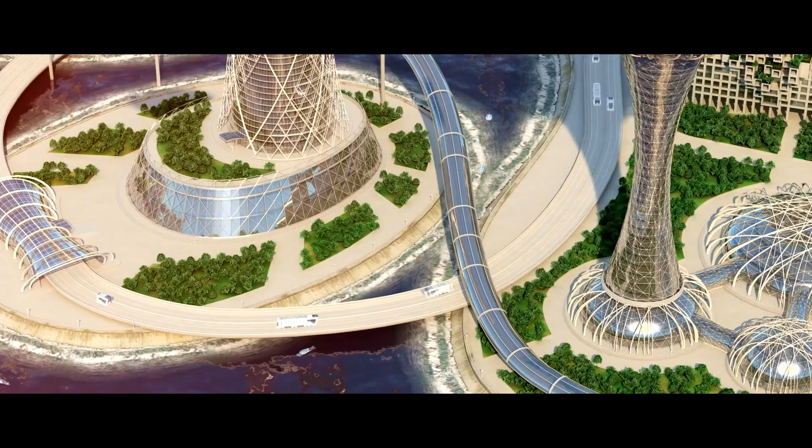To do big things, to do good things, to have a vision—this always drives me in my life. With the LEA technology, we now can contribute to a sustainable global ecosystem as well as to an enhanced telecommunication via space.

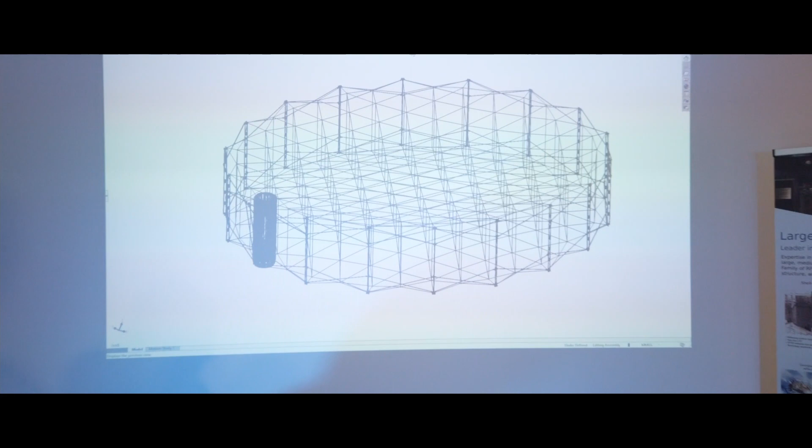Big things can only be achieved when you can count on a team which follows you, which believes in the goals, not only at your own company, but also at the partners, at the subcontractors, all the way long, and even during the Corona restrictions.

LEA is another proof that the ESA programs and the programs of the European Commission can create so much fantastic synergies. The trust of both institutions in us, the LEA team, boosts us now into the world league.

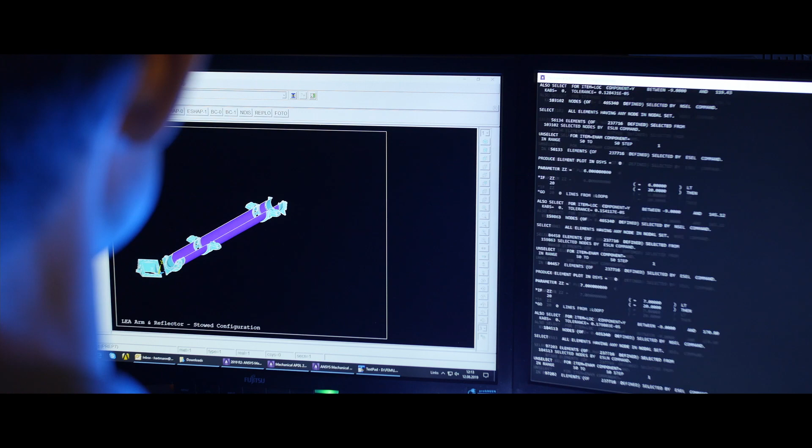The LEA X5 development marks a significant milestone in the development of a European-sourced large deployable reflector subsystem. Such a subsystem is composed not only of the arm and the reflector, but also of a number of other elements.

Being it the hold-down and release mechanisms, being it the electronics with the harness to control the system during the deployment, or the thermal insulation to protect the hardware from the harsh environment in space, just to mention a few of them.

But all of these elements are brought together by HPS to form a qualified large deployable reflector subsystem, LEA.

I'm involved in the technology development of large deployable structures since the beginning of my professional life. In 2010 I started as a research assistant at the Technical University of Munich, and in 2016 I joined HPS, becoming the lead engineer for large deployable structures, including LEA X5.

I'm really proud to be part of the team, having achieved a major milestone with qualifying the LEA X5 subsystem.

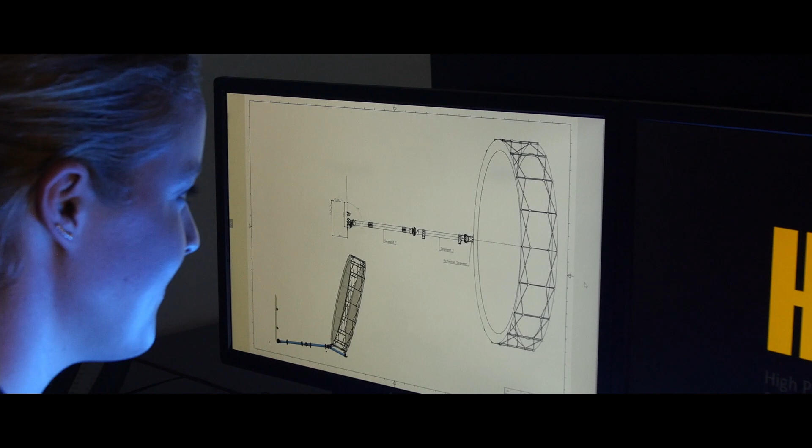Building on the LEA X5 success, I am already working as the project manager for the large deployable reflector subsystem on the follow-on project CIMR. We have a very challenging schedule, with the next milestone being a successful preliminary design review already next summer.

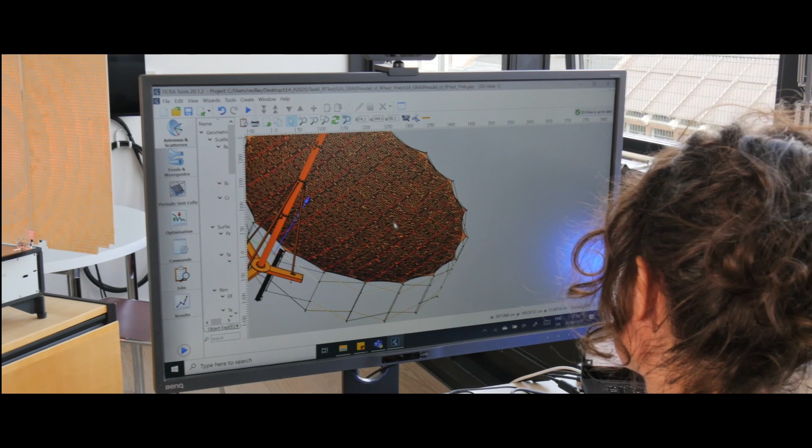TICRA has 50 years of experience in modeling reflector antennas, and our software GRASP is used by all players in the world doing large deployable reflectors. So for us it was a must, but also a great honor to be part of the LEA project and give our expertise to such an important development.

So it was our responsibility in the end to tell if the LEA antenna performed as expected. So it was a huge responsibility.

I have passion for space and I'm a European citizen. So for me, working with an antenna that could be launched in space has been a dream.

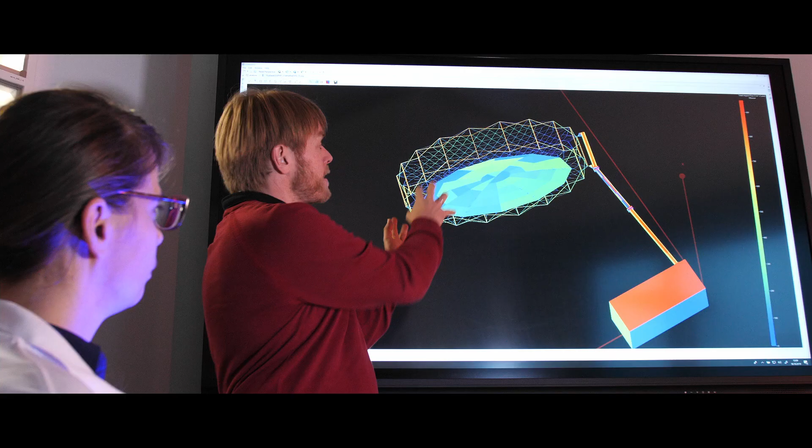After more than 20 years of extremely reliable software developments for space debris simulations and onboard software developments, etamax now proudly contributes to the safety and reliability of LEA in space.

RUAG is a reliable and dependable supplier of deployment systems, and we as a company stand for 100% mission success.

With the LEA project, the technical and programmatic foundations were laid. Examples are the way of working, the development of the deployment subsystems, or materials and processes. So now we have all the solutions and concepts ready to turn this heritage into flight hardware very quickly and efficiently.

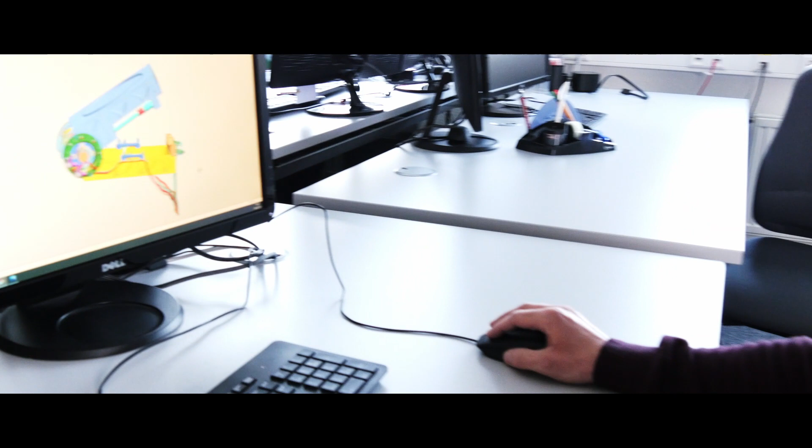LEA started with an idea, and right now we're developing the real flight hardware, and it's quite exciting for me to be part of this complete development cycle and to be part of this straightforward team.

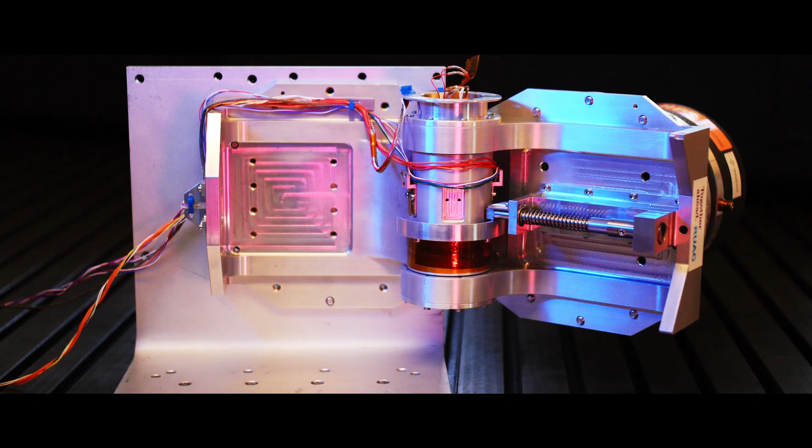On the other hand, we're part of the Sentinel program. At the end of the day, our hinge has to deploy a 60 kilogram mass at the end of an 8-meter arm. So we are building a system which helps us better understand what's going on Earth, so to understand climate change.

This project opens up completely new business opportunities, not only for the European space industry, but also for our company, von Hörner und Sulger. It's a huge step for Europe's technological non-dependence.

As successfully shown over the last 50 years of our company, von Hörner und Sulger, we use our highly competent and creative team to develop the best solution. The overarching collaboration of several SMEs, bundling their profound expertise, is extraordinary and unique, enabling a new dimension of creativity.

In all HPS Romania activities, we have collaborations with other Romanian entities, companies and institutes, and we are ensuring them access to the European space market.

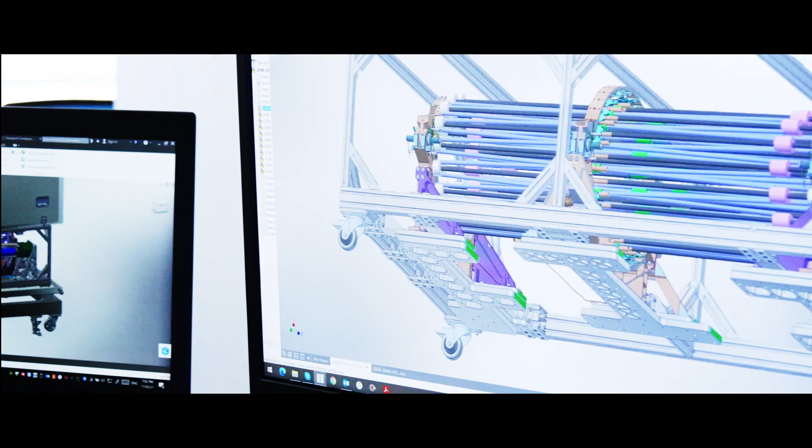And I have to say that this is an opportunity for all professionals here in Romania, because we have many highly qualified people able to deliver great quality products at competitive prices.

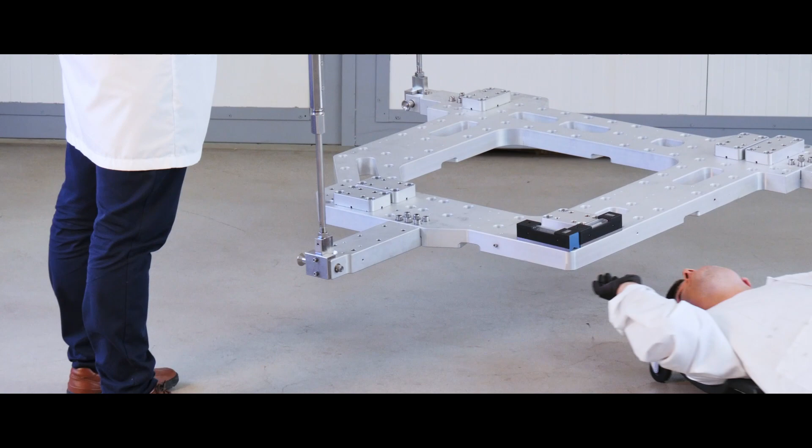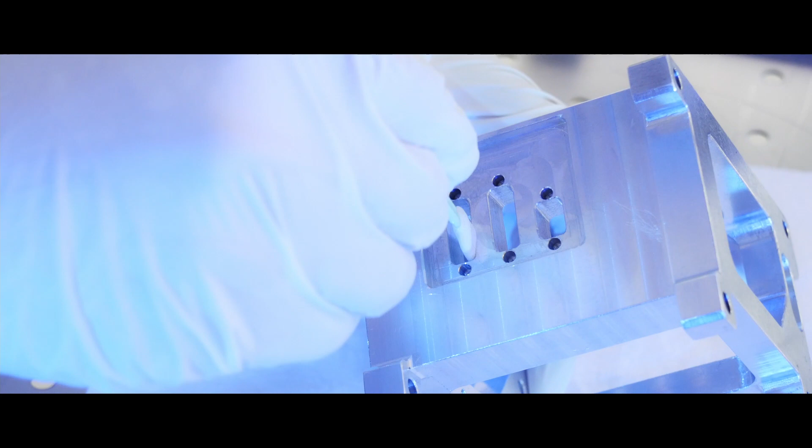HPS Romania became an important supplier of high precision MGSE assemblies and metallic parts, and managed to provide fully qualified products for various important missions.

And to sum up, we are enthusiastically looking forward to the future and to see our contribution on board future space missions.

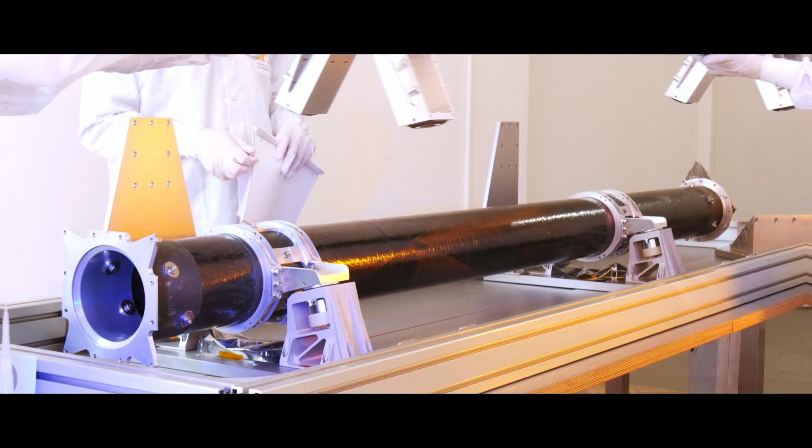Unique from my point of view was the multidisciplinary character of the LEA project. It was the first time I saw so many different specialists—mechanical, thermal, electrical and RF engineers—teaming up and working together. Synchronizing and guiding their work brought us where we are now.

Deployment accuracy, repeatability, RF performance, high structural stiffness while keeping the mass low were the major challenges that we had to approach.

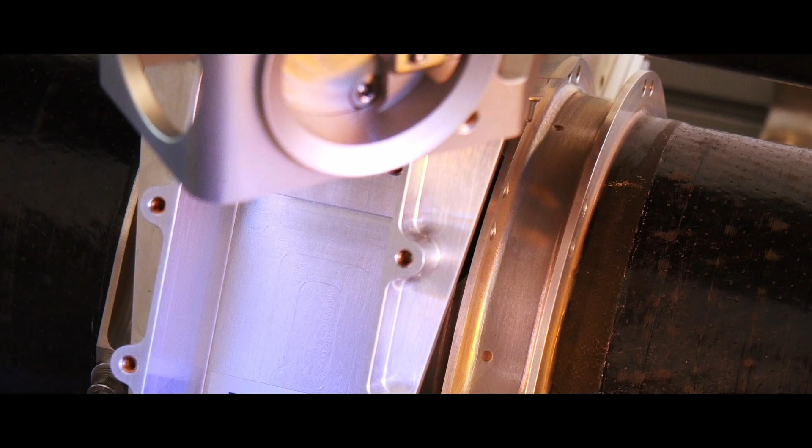For a high technology space project, it is of utmost importance to have a stringent product and quality assurance process set up and implemented. These processes need to follow the highest standards as defined by the ECSS and are applied by the European Space Agency for all their space projects.

Since INEGI has been committed to the European space business for more than 15 years, it now represents more than 10% of our turnover and is an area we define as a key strategic development area for INEGI, and also for the country. So in that sense, it's important for Portugal to be more present in the space industry.

So within this strong and committed team, one special word for HPS Germany, that we've been working with since 2007, so it's been a long-term partnership and quite profitable for both organizations.

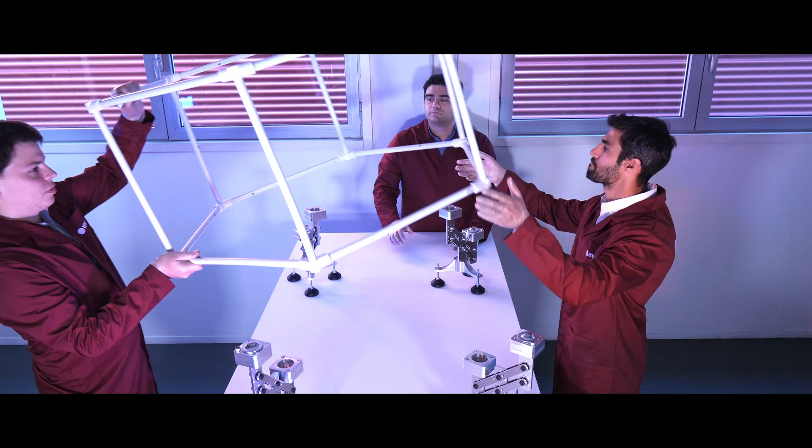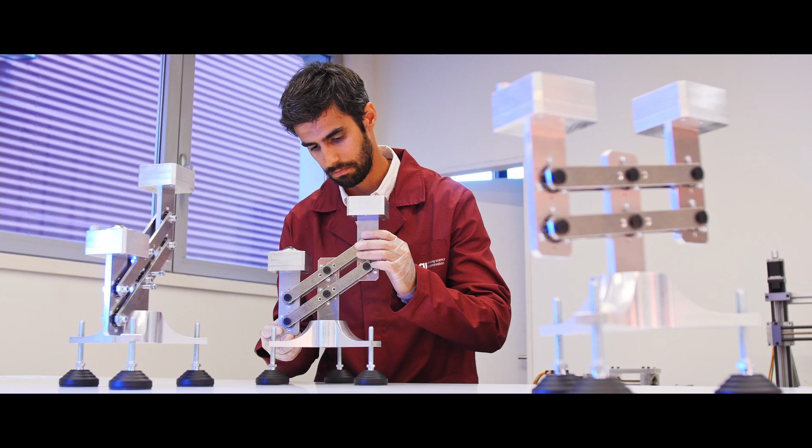My personal motivation to be part of this project is that it is a life opportunity to be part of European space history, and I really feel honored and lucky that I am part of such a great team.

Large antenna technology is really important. Our world is growing, and with this growth, it is critical that we start monitoring more closely how we are impacting the negative outcomes of this growth. We really need to observe our world.

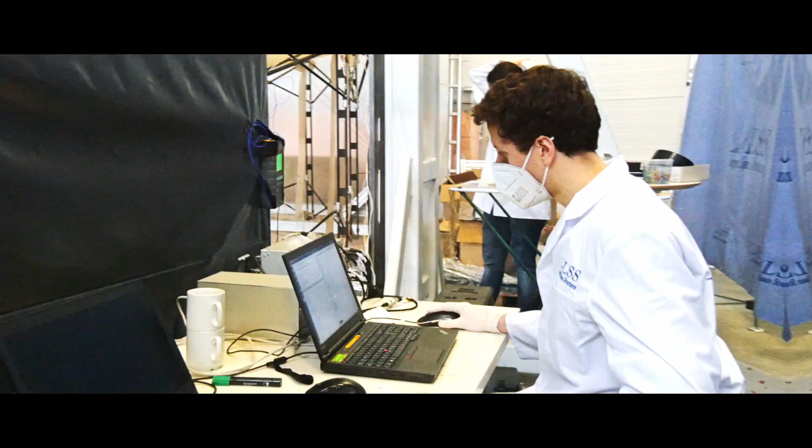Time framing during Corona restrictions was really not so easy, but we still managed to go with home offices mixed up with office work, and MAIT hall and workshop work, so that at the end it worked.

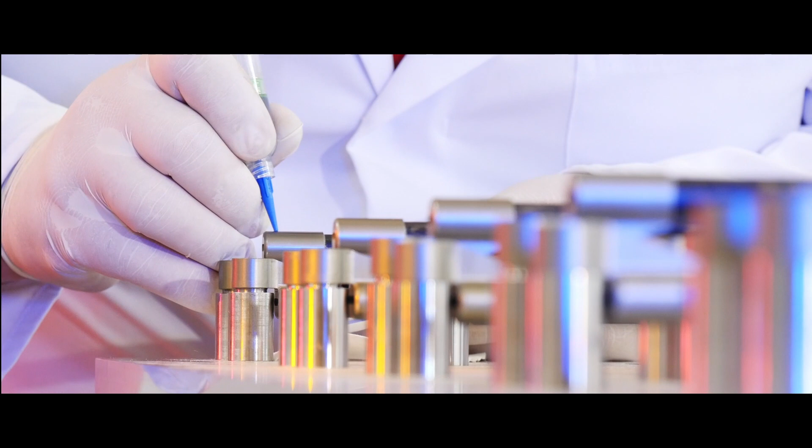Whenever we are facing any difficulties or unexpected issues during these activities I'm more involved in - manufacturing, assembly, integration and testing - I try to remind them that this is the first time Europe is performing a project like this. We can do it always with a smile and by working together.

The amount of parts we are talking about in our structure is very high. We are talking about a range of several thousands of small parts, including very, very small parts up to larger parts, and all of them contribute to the accuracy of the reflector.

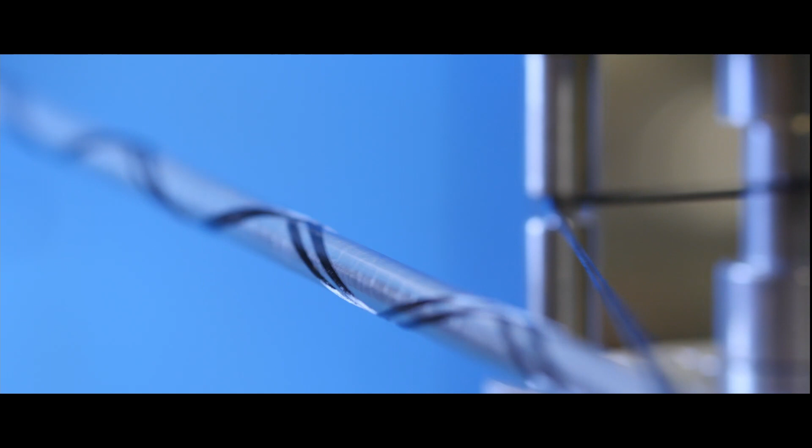FHP supports this development in order to ensure independence of key technologies and capabilities of European industry in a worldwide competitive market. With this team, we will have the first step of getting the autonomy of these critical technologies.

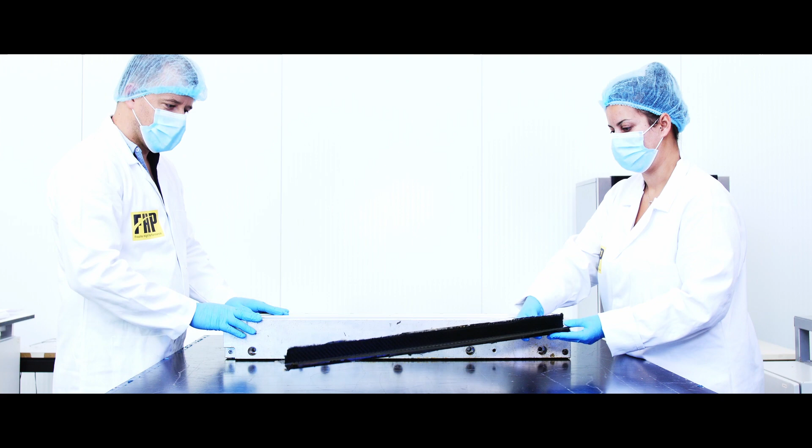My personal motivation is actually my personal contribution to the monitoring of our planet Earth. And I'm sure this project will demonstrate the value of the European space industry.

As someone said, progress is impossible without change. If people cannot change their minds, they will not be able to change anything. I believe this project, by an innovative approach, will be a unique opportunity and for sure will be part of our legacy for future generations.

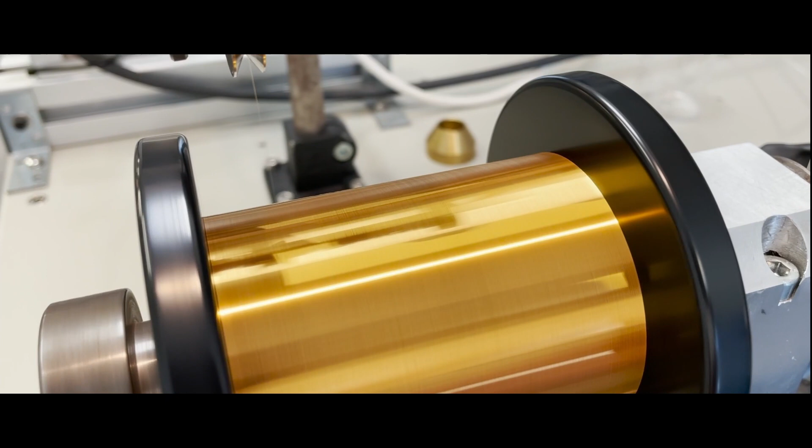The development and especially the manufacturing of highly flexible meshes for antenna applications is a very complex and demanding task. It is made of a very special technical textile, the so-called knitted mesh. This is made of a gold-plated wire that is thinner than a human hair.

The gold plating enables a highly electroconductive surface, while the mesh has outstanding foldability which is needed to successfully deploy once in orbit.

To face this challenge, the idea was to combine the RF and space experience of HPS with the industrial knitting competence of IPROTEX into one joint venture called HPTEX.

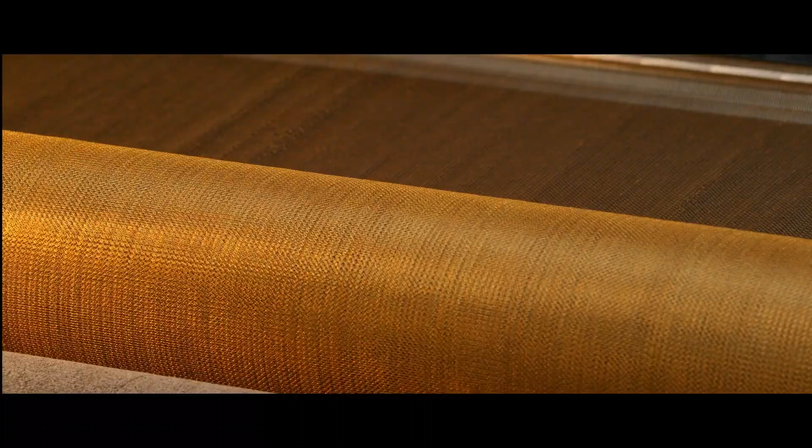Upper Franconia is a region in Bavaria that's world famous for its textile heritage. At iProtex in Münchberg, we rely on the textile know-how in the region.

With our joint venture HPTEX, we now can bring our extensive heritage of high-tech fabrics into the domain of space technology. In the last years, we have assembled knitting machines, developed special parts and tested new, innovative knitting movements.

It's great to see how thousands of gold-plated wires combine to create a mesh with a length of over 50 meters.

And the requirements are very demanding. We are talking here about accuracy ranges of several tens of micrometers, which are extremely demanding to achieve.

And of course now it became kind of part of me because I have to follow this from the concept up to the end. We're doing something that's incredibly difficult, that no one did in Europe, and we're trying to push the technology to a point where no one ever did.

Joining all this expertise from all over Europe gives a really strong feeling that we will be successful all together.

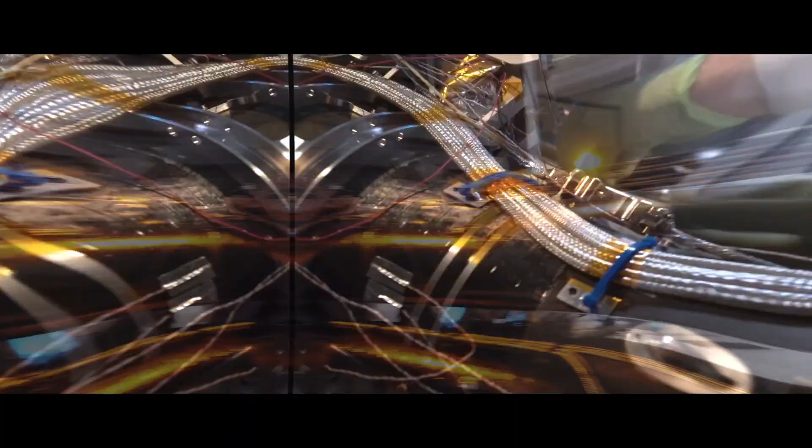Also, we have done the final test related to the final unit, the protoflight unit, and trying to get at least TRL 8.